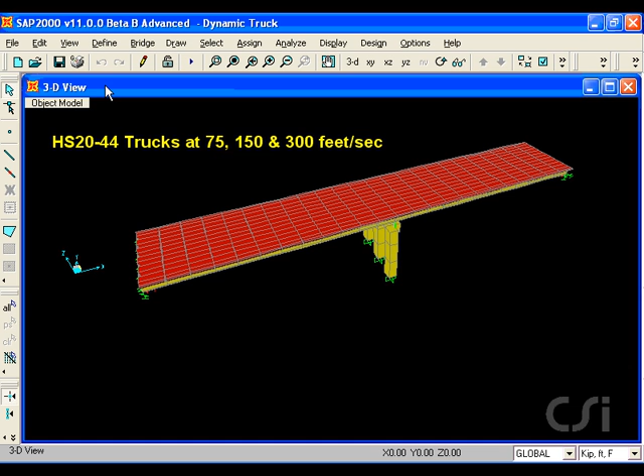This tutorial will illustrate how a moving vehicle can dynamically excite a bridge. We will run an HS20-44 truck at 3 different speeds to see the different responses.

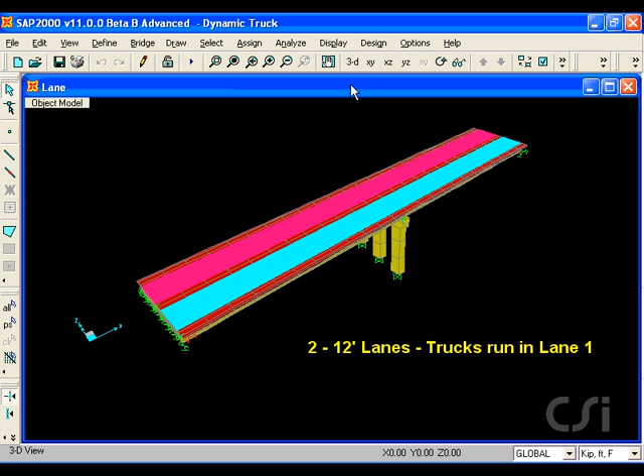Our composite bridge is 2 spans, each with a length of 100 feet. It is 36 feet wide, constructed with steel girders, cross bracing, and a concrete deck. It has 2 12-foot lanes, but we will only load lane 1.

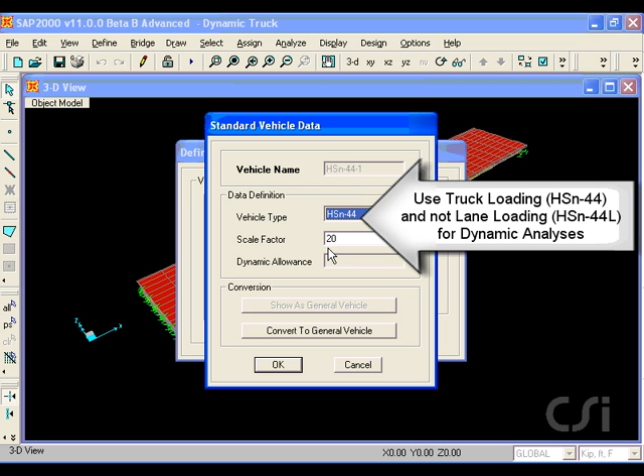We start by defining our truck. When using a vehicle load for a dynamic analysis, it is important to use a truck load and not a lane load. We next add our vehicle to a vehicle class.

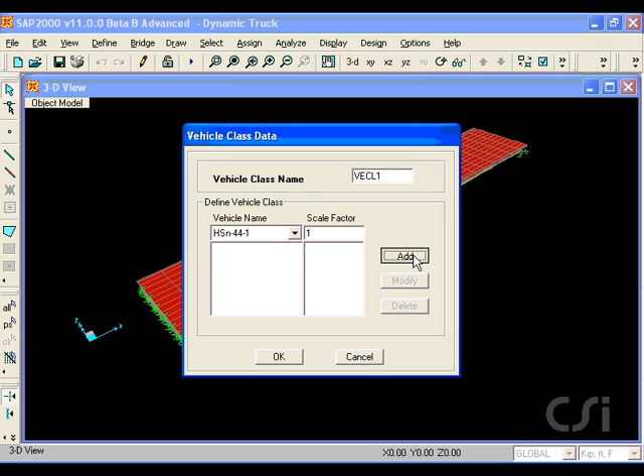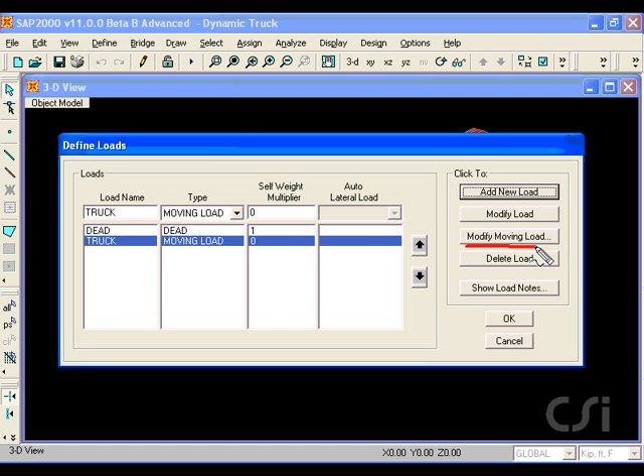Now we will define our moving load case, which we will call truck. Clicking on the Modify Moving Load button allows us to specify how the trucks will run over the bridge.

Here we can specify the vehicle, the lane, the start time, which for the first truck will be 0, and the speed, which will be 75 feet per second for the first truck. For the second truck, the start time will be 6 seconds, and the speed will double to 150 feet per second.

For the third and last truck, the start time will be 11 seconds, with a speed of 300 feet per second. We are using speeds higher than typical to cause a significant excitation of the bridge. We will use a 15-second duration for the load and a 0.05 second step.

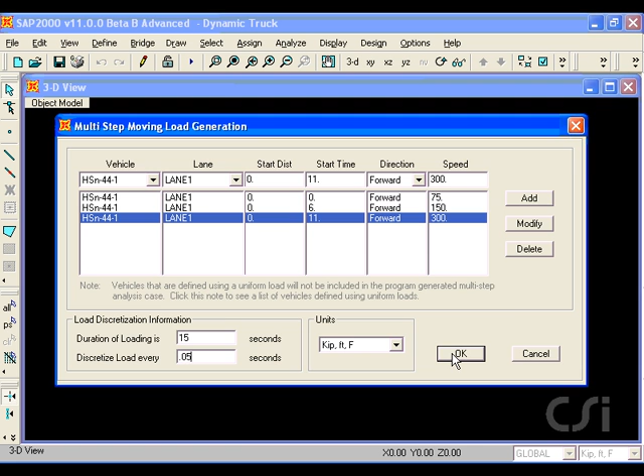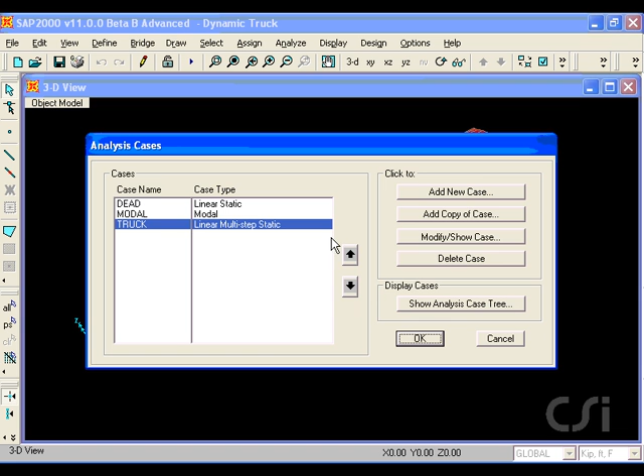The last step is to modify the analysis case. Note that a default case for truck was created as a multi-step static case. We will change this to a time history analysis so that the dynamic behavior will be included. We will leave it as a linear analysis, but change the time history type to direct integration.

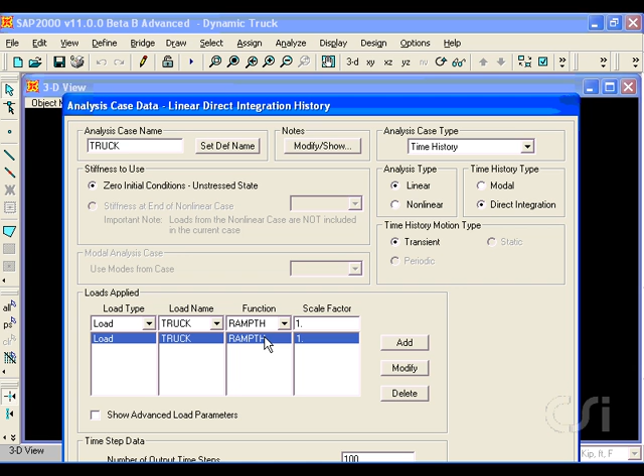The program automatically creates a default load application using a ramp function to apply the truck loads, which we will not change. We will ask for 320 time steps and a step size of 0.05 seconds. We are now ready to run the analysis.

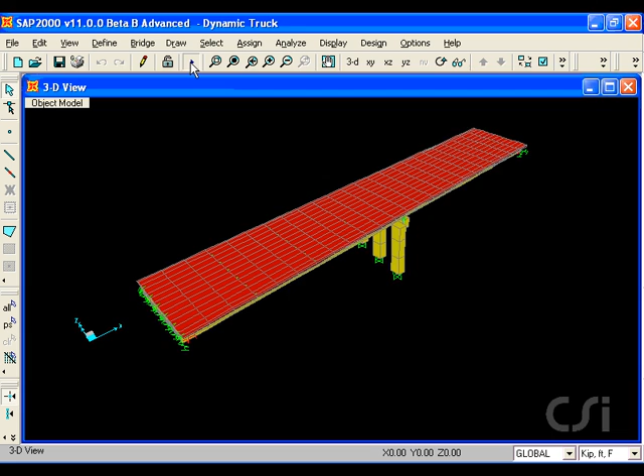Note that the truck analysis case is now a dynamic case. We will shut off the modal case as we do not need any mode shapes for our analysis.

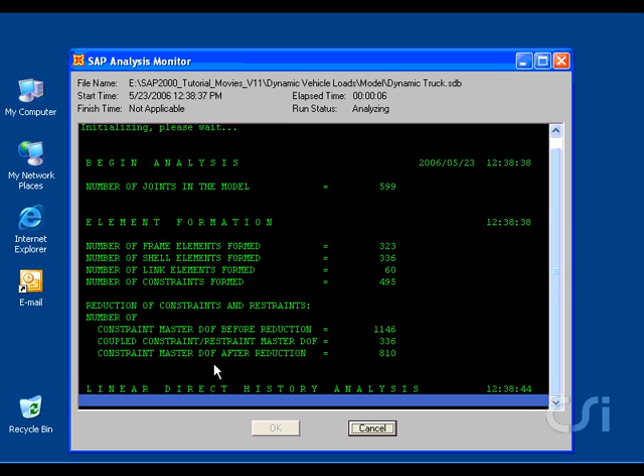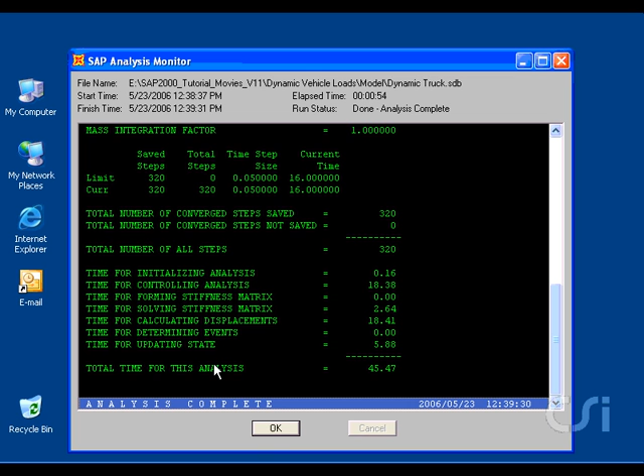With the analysis complete, we can display the deformed shape. In this case, we will show the shape at 1/2 second into the analysis. However, the dynamic effects of the vehicle loading can best be seen by creating a movie.

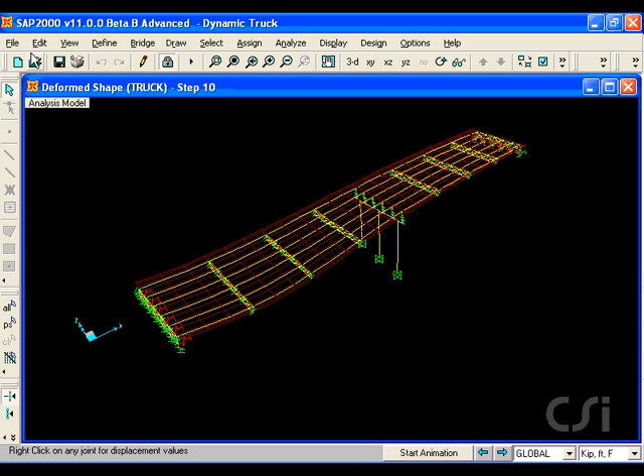Here, we will create a movie for the truck analysis case. And we want to make sure that the trucks are shown in the animation.

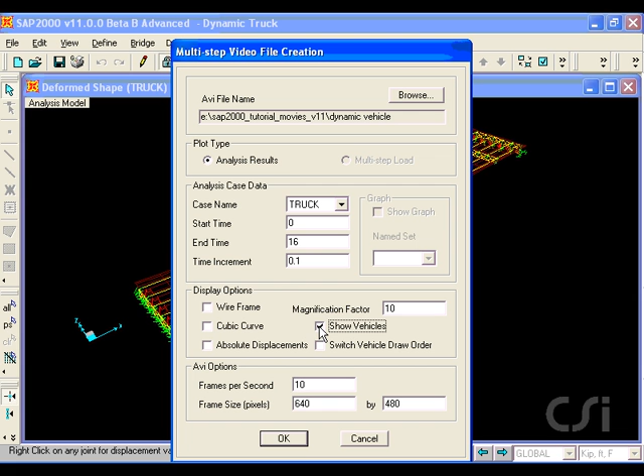When we play the movie, we see that the first truck has a limited dynamic effect on the bridge. And the second truck just slightly more. However, the third truck causes significant excitation of the first mode of the bridge.

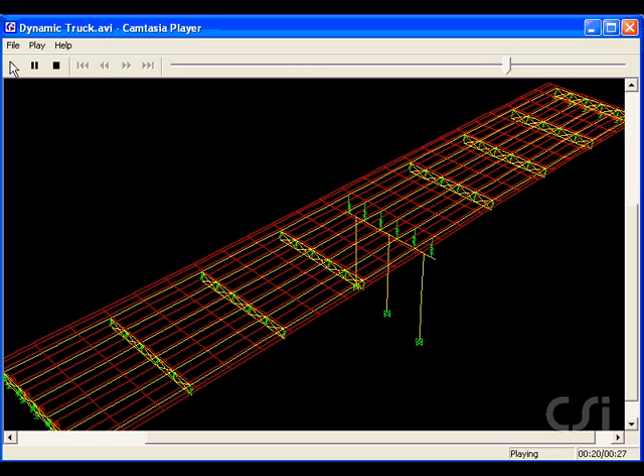Once again, the first truck at 75 feet per second, the second truck at 150 feet per second, and the third truck at 300 feet per second.

In conclusion, bridge structures may be sensitive to the dynamic effects imparted by moving vehicles, and SAP2000 offers a powerful and easy way to include and view these behaviors.